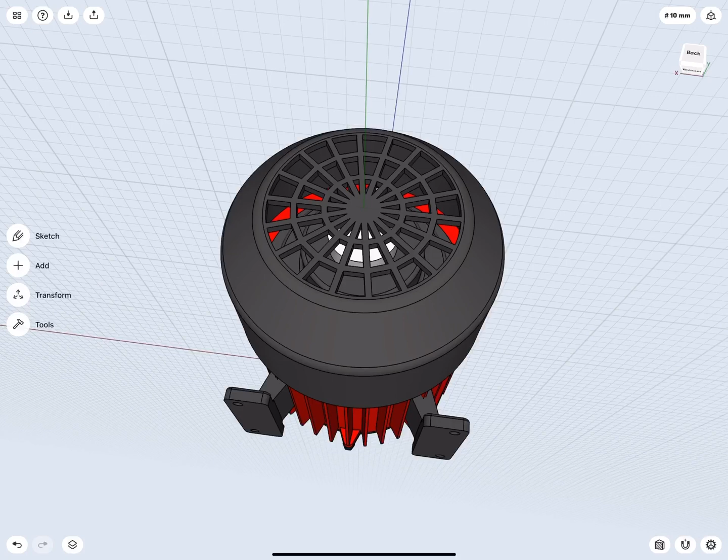Let's take a look at creating the fan pattern on the back of our end cap here. This is going to be a fairly complex sketch. Let's start. Apply some detail by selecting the edges and giving it a 10 mm fillet.

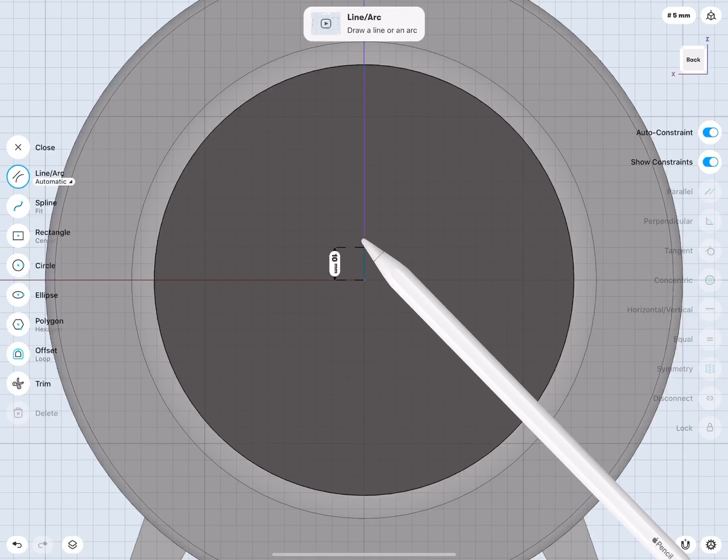Double tap on the smaller, planar face. Starting from the middle, draw a line till the edge. Notice that this created a circle automatically from the edge. Draw 2 more lines from the center.

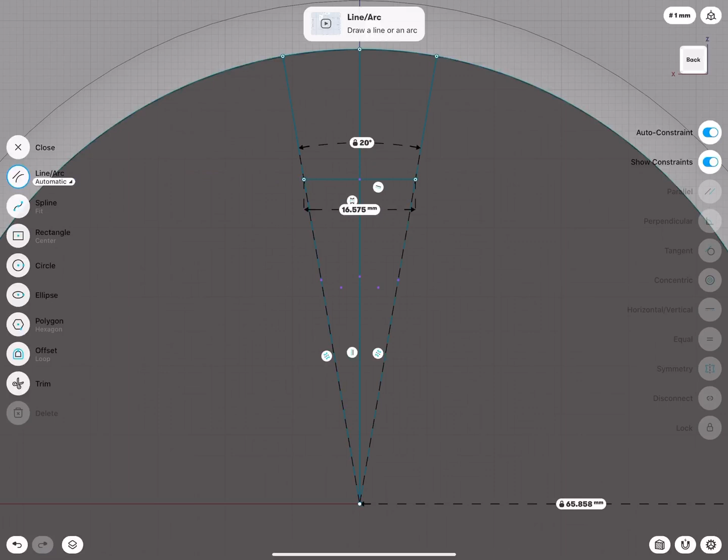Select them and apply symmetry, using the middle line as the axis. Select them again and define the angle between them at 20 degrees. Zoom in and draw 2 horizontal lines. We will define them further a bit later. Make sure that both lines are horizontally constrained.

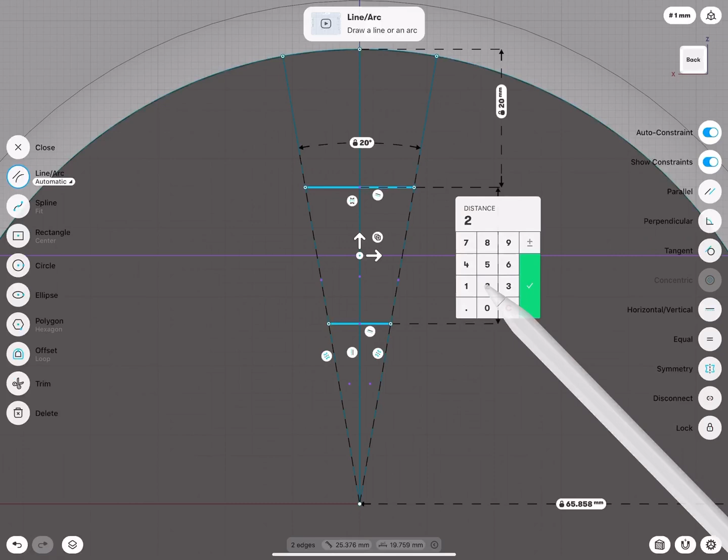Select the upper line and the point at the top. Define their distance as 20 mm. Now, select both horizontal lines and define their distance as well as 20 mm. I'm going to delete the line in the middle. I won't need it.

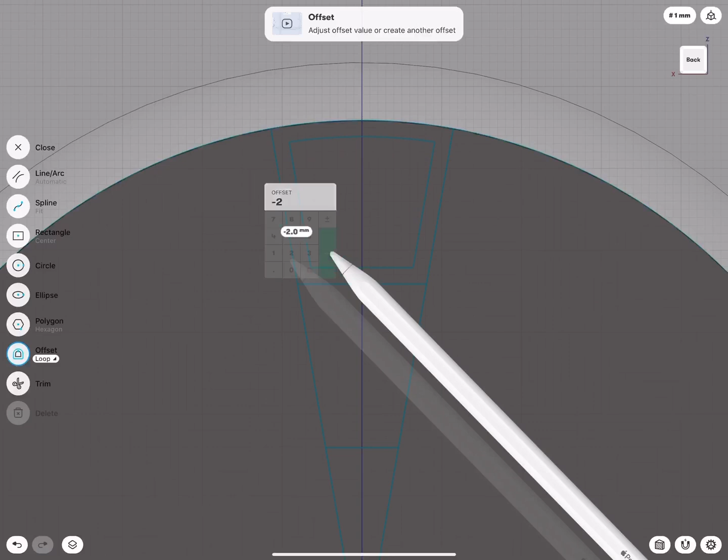Go to the Offset menu, make sure it is set to Loop. Offset all 3 closed sketches we have created by 2 mm. Select the outer sketches and delete them. We won't need them anymore.

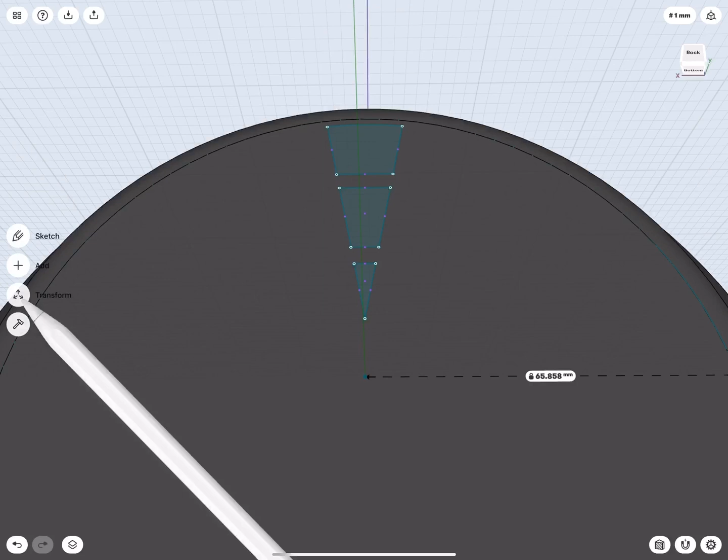Swipe up to move to 3D and zoom out a little. Go to Transform/Move/Rotate and select the sketches so we can rotate them. Snap the middle point to the center by dragging it to the edge. Turn on Copy.

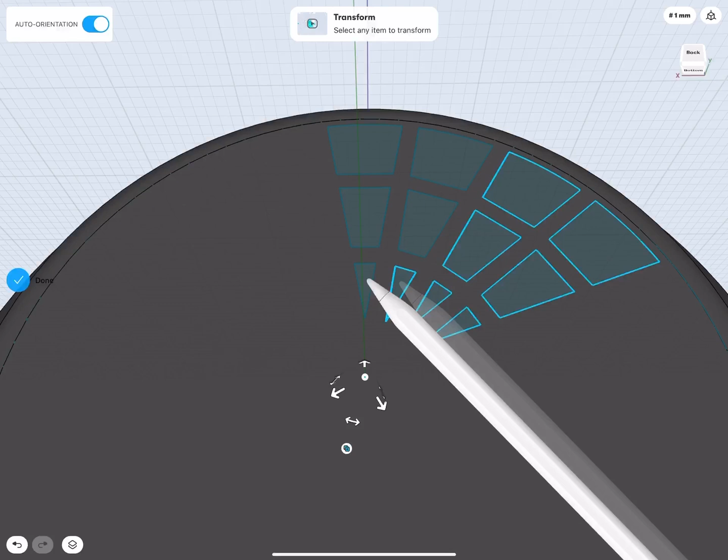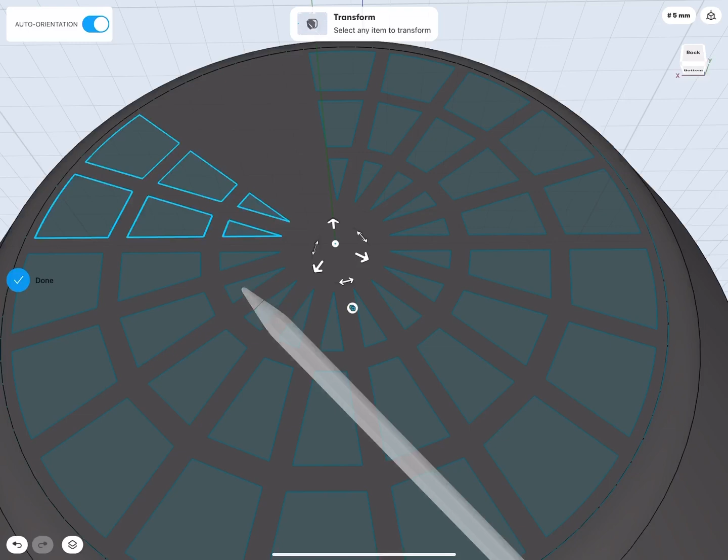Rotate it by 20 degrees. Select the sketches again and rotate by another 40 degrees. Repeat this until you have covered the whole face. Tap Done.

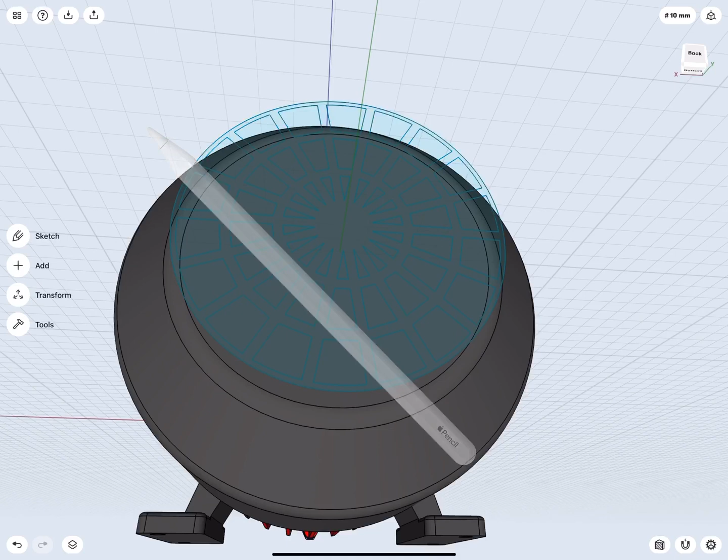Go to Items and select the sketch plane. Move it 20 mm away from the end cap. We need this to do a little trick with intersect. Now, grab the outer circle and make it wider than your end cap, let's say 100 mm.

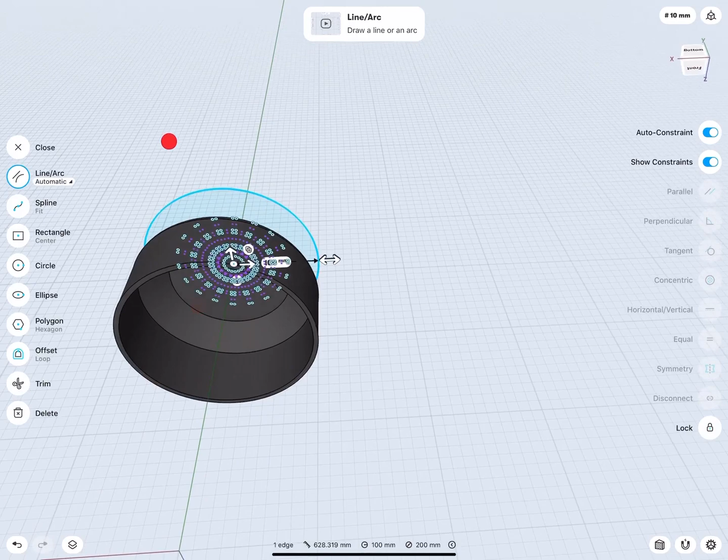Now I'm hiding all folders except the end cap. Rotate my view into position. Select the bigger closed sketch and push it towards the end cap. Open the Boolean Options badge and select Intersect. I used this method to save a lot of time on selections.

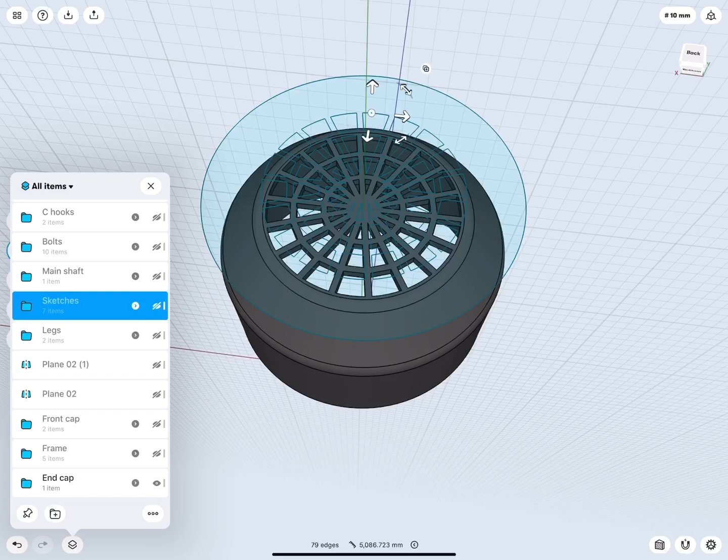The last thing left to do is to make everything visible and move sketches into their folder. In the next and final lesson, I will move all the screws into their final position.